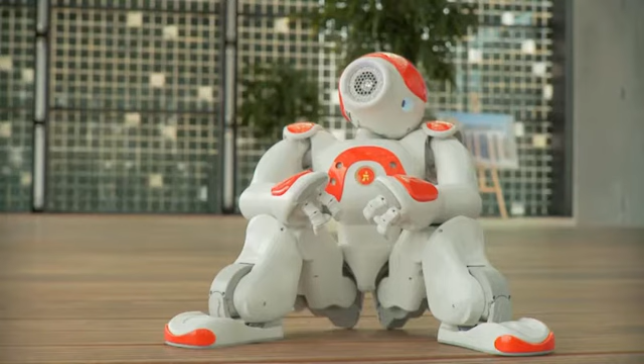I want to come with you.

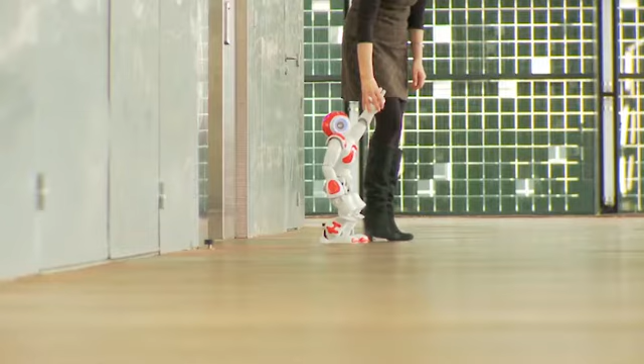Our goal with robots is to have robots helping people, and not only the geek. I want to have robots helping everyone. But in order to do that, we need to have the robot accepted by people.

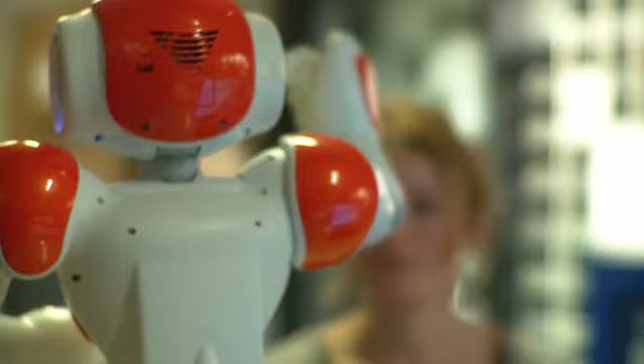I'm Bruno Maisonnier, head of Aldebaran Robotics, founder and CEO of the company. Give me something, please.

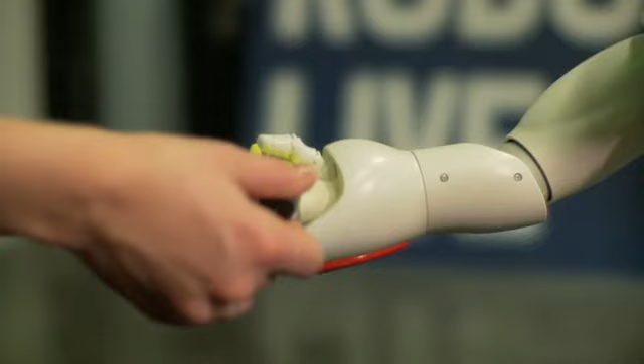We think that the robotic market is going to be huge in the future. And this comes from the simple fact that the world population is aging very fast. And we need robots to do whatever they need at home.

What do you want me to do? When people are depending on someone else and need to have someone else helping them, they are in a secondary position. But when they have a robot doing that, they are in the first position. They are leading.

Notre Dame University, United States, they are really working with robots helping autistic kids. So we discovered that robots are objects they can interact with, they are comfortable with interacting with robots, they like it.

The first impression that you get when you see the robots is the outside shapes. If the shape, if the form is too aggressive, you won't interact with that robot.

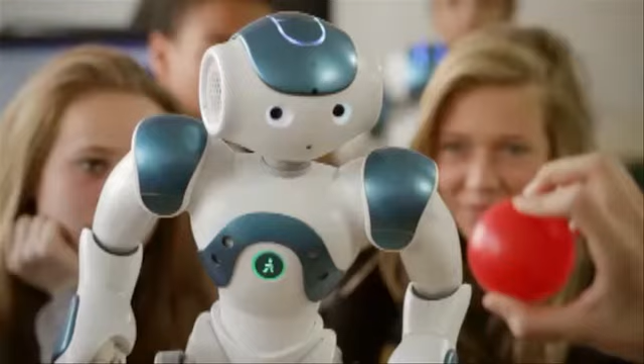There are many people ready to develop softwares, but we are just lacking robots. We are just missing robots. So that's why Aldebaran began with a platform for providing all those who want to explore this new world, who want to be part of this revolution, to be able to do it.

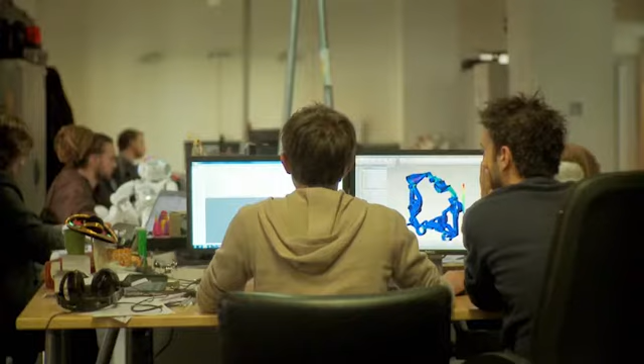I've been working for Aldebaran Robotics for 5 years as a mechanical engineer. I especially work on designing gears and integrating motors into the platforms we develop at Aldebaran.

Like Ludovic, I am also a mechanical engineer. I mainly work on the shells, but also on internal parts and the structure.

For each project, the process is similar. We start with sketches, essentially 2D images, that we then translate into digital data and 3D volumes using SolidWorks surfacing tools. This gives us the ability to rotate the pieces and robots in the space and to improve the design when it's not as pure as we want it to be.

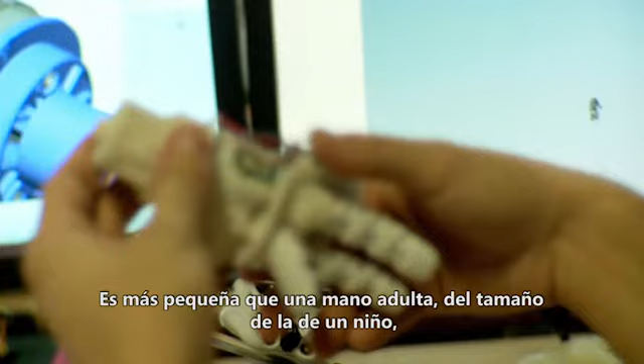So we start with the exterior design of the hand as we have here. It is smaller than an adult hand. It's the size of a small child's hand. And inside there are over 100 parts just for one hand.

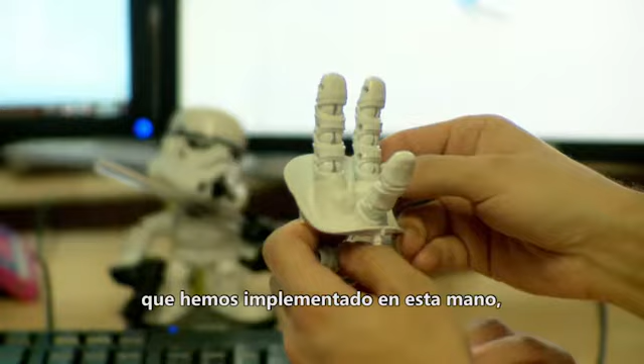In addition to all mechanical constraints, we have 2 degrees of freedom that we have implemented in this hand, and SolidWorks allows us to look at all the possibilities and optimize the mechanical design inside the hand.

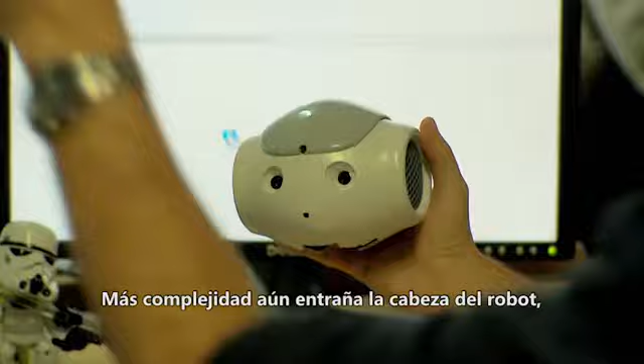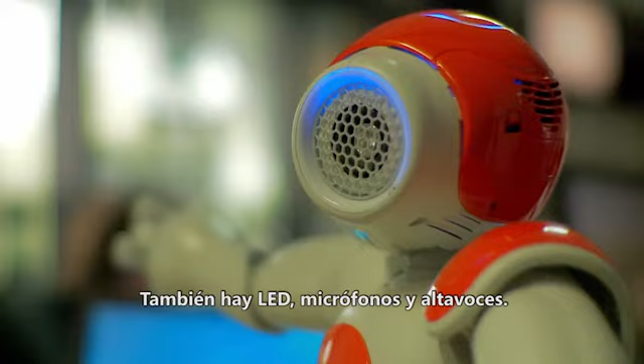Even more complex is the robot's head, which combines mechanical, electronic, and optical components, like cameras, for example. One might say that all NAO's intelligence is gathered in its head. There are also LEDs, microphones, and speakers.

We use SolidWorks simulation, which allows us to generate digital models and know if the part will resist to shocks or not, based on stresses we apply to it. And once we have proceeded with validation in SolidWorks, we can move on to production.

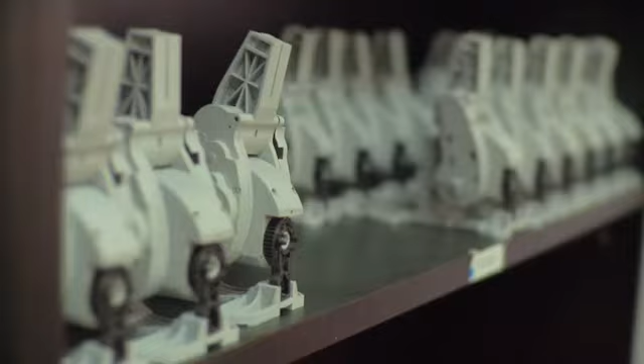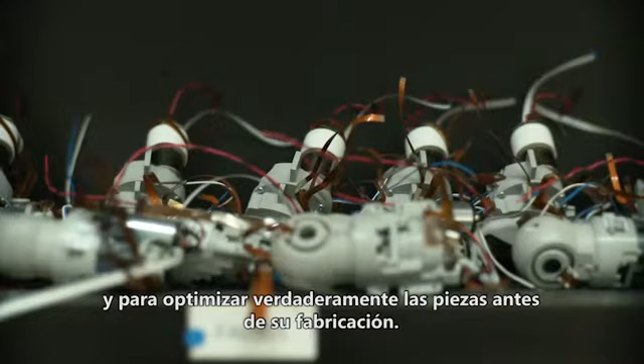We use SolidWorks in order to project the product into the future, and we can really optimize, really improve the parts before it exists, before it is manufactured. You have to know that into that robot there are more than 1,200 plastic parts.

On my team there are 45 people working on the design, and I need to orchestrate the daily work and make sure that when we create new parts, the version is correct. So for that we use EPDM, and it helps us to focus on innovation while EPDM is taking care of the structure of the project.

I hate the techno stress. I don't want to have devices that are asking me to invest intellectually to understand how they're working. So I don't want my robots to create techno stress to people.

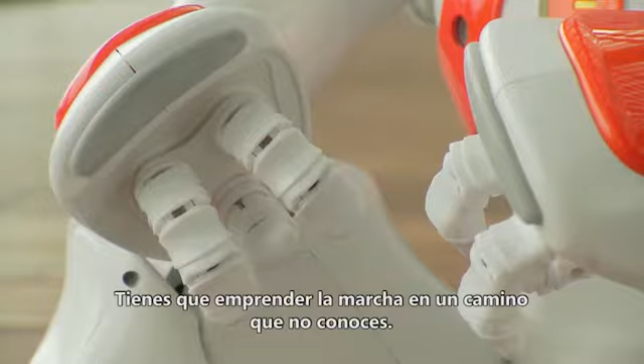When you want to change the world, to improve things, you have to go beyond what you are able to do. You have to decide to go for something you don't know how to do. It's a new territory to conquest. Shall we try something new today?